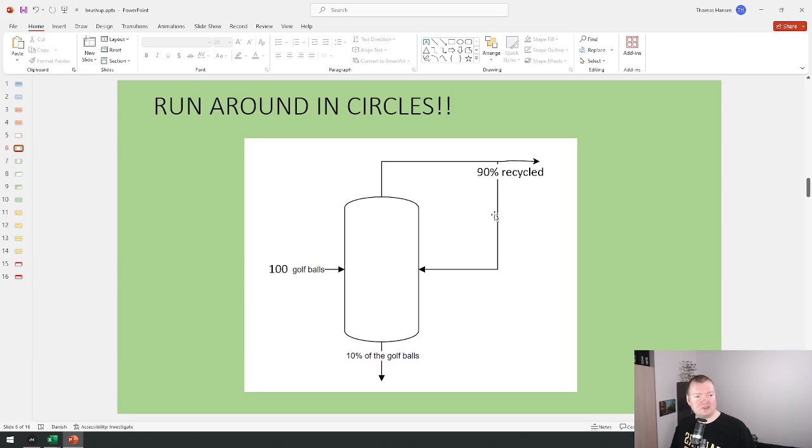So I know that I showed some of my students this lovely example here where we have an extremely simple system with some golf balls entering into a tower. Some of them go out the top, 10% go out the bottom. Then we have a split where we recycle 90% and then it just continues moving on. Now, if we didn't have the recycle, this would be so easy. 100 golf balls enter, 10 of them go out the bottom, 90 go out the top. The system is now in balance.

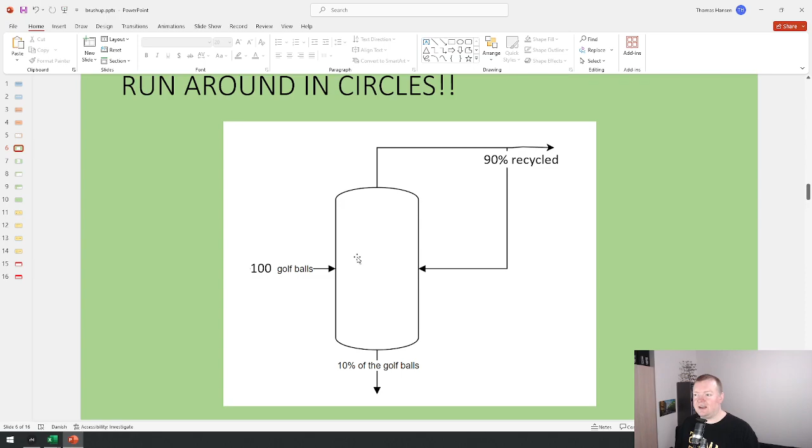The problem is when we start to have this recycle, the 10% is not based off of the feed, it's based off of how much is actually in this tower. And I actually tried to set it up in a lovely document called Thomas Hates Us, because of course I do, that's the way it is. And I have set up a simple mass balance, so I have my system and recycler, and then I have the two extra rules. 90% is recycled and 10% of the total amount in this tower gets thrown out the bottom. And when I solve these equations, I can easily get these results.

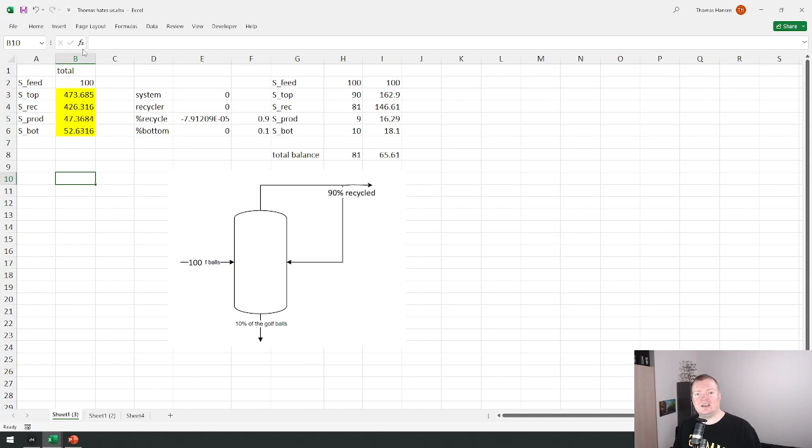And as we can see in my solver settings, I basically set it up like we normally do.

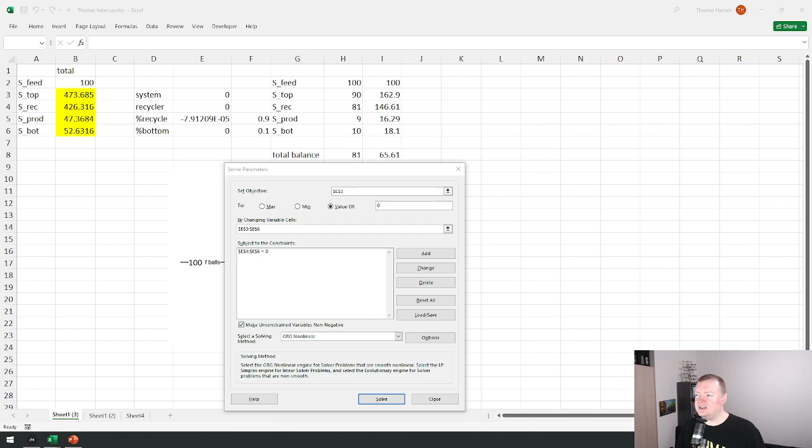Actually, I think I forgot to change. Let's just turn my lovely screen into grandmother mode so it'll be a bit easier to see on stream what's going on. There we go. Nice and massive things. Oh, it looks horrible in real life.

But the thing is, some of you might say, well, can't we just do it by hand? Can't we just take it step by step? And the thing is, technically you can. So for instance, over here, I've started to set it up. So I said the first time I send in 100 golf balls, I have 100 in my feed, 90 goes out the top, 10 goes out the bottom. And then I can easily calculate, well, if 90 goes out the top here, 90% is recycled. So I just take 90% of that. That's what's recycled. And of course, the rest goes to my product.

Now, the next time I send in 100 golf balls, I say, okay, I'm going to add 100 balls in the feed. In my bottom stream, I'm going to take 10% of what's inside of this tower. Now, that would be my new feed of 100 and the recycled stream of 81. So that means I'm now sending 18.1 balls out the bottom of this system. And similarly, I can calculate, well, if I take all of the balls, subtract the ones that went out the bottom, the rest must exit in the top.

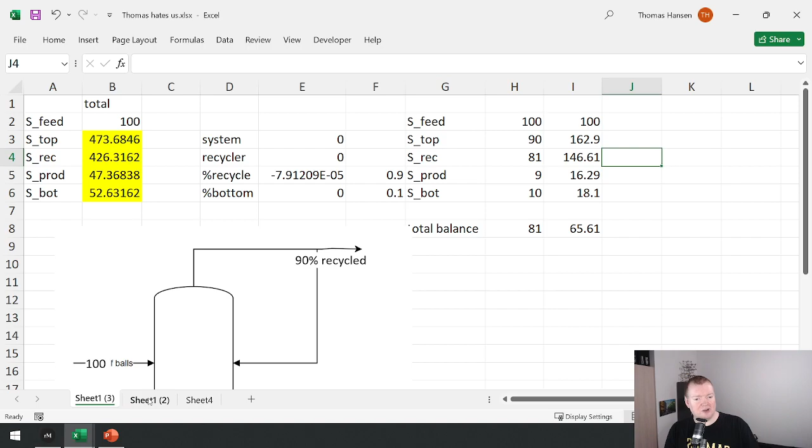Well, I made the slight effort of actually trying to calculate this. So every time we go one step, that's another 100 golf balls we are feeding into our system, and we just keep going until down here I put in my total mass balance. So that's how many balls are in the feed, how many are in the product stream up here, and in the product stream down here. And of course, we know that if a mass balance is matched up, this should give us 0.

You can also see here, this is the number of steps, so the number of times I have to do calculations. And when I was doing it, I figured out I was doing 4 manual calculations each time. So how many times do I have to repeat it? Well, actually we can just look. This is my total mass balance, so we need to be sort of in the area of 10 to the minus 12.

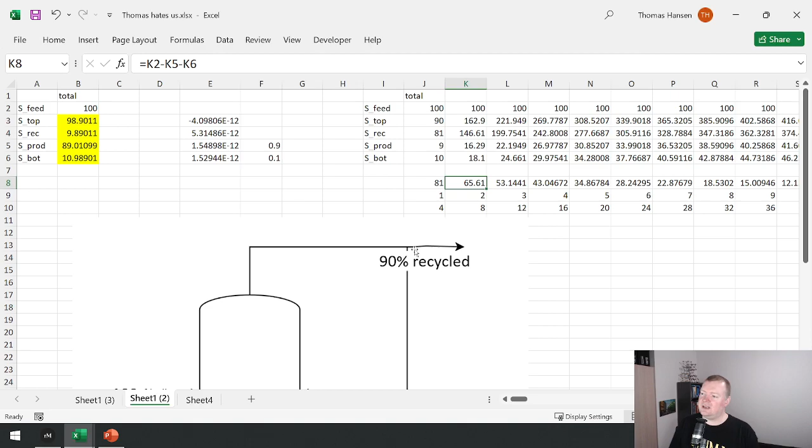So we start here, and then we start going and going and going. 6, 7, 8, 9, 10, 11, something around here. So now we're sort of getting to the same ballpark precision as what I had with the way I solved the mass balance. So yeah, somewhere around 580 or 600 calculations in order to get the same level of precision.

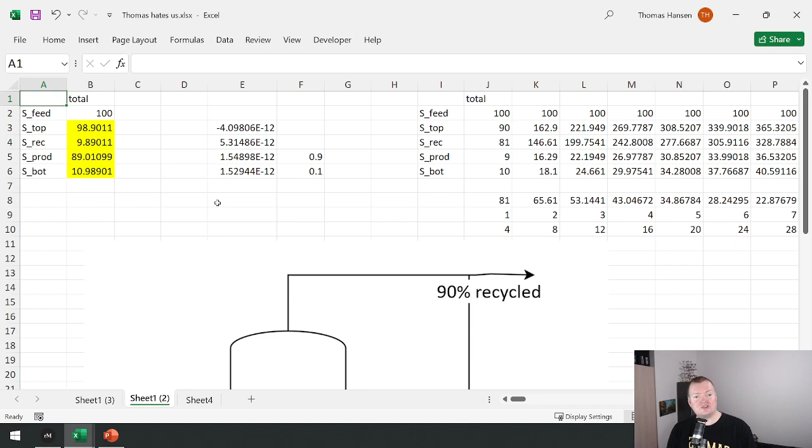Now, we don't want to do 6,000 calculations each time manually. We want to somehow make it automatic. So that's why when we start to get into recycles and bypass streams, it becomes so much more difficult to deal with without using Excel and solving all of the equations simultaneously.

So normally we could say, what is the value of, let's say, the top stream here? Well, that would be this stream plus this stream minus that stream gives me this stream. Unfortunately, this stream will depend on this stream, and then I have this circular loop. So it's also very easy if you try to do it non-systematically in Excel to get circular references where Excel just goes, you can't do that.

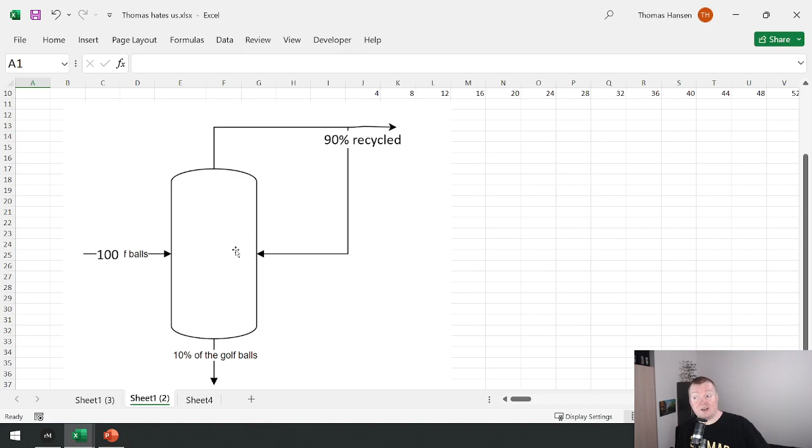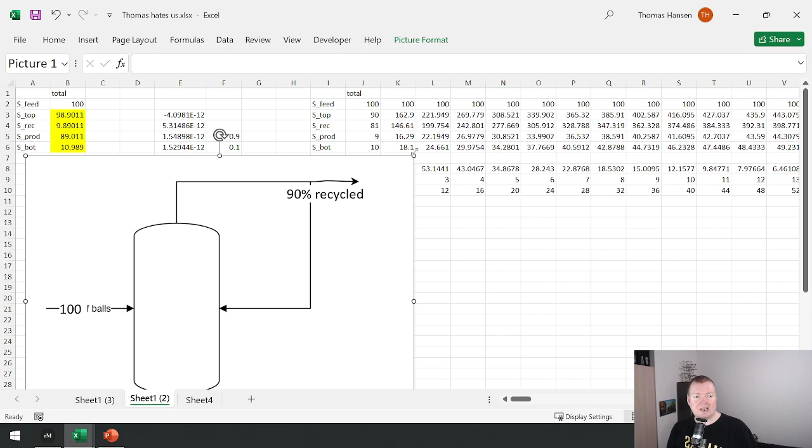You can't say that you want to calculate stream 2 based off the value of stream 4, and you want to calculate stream 4 based off the value of stream 2. That's just not possible. So as an example here, let's just shrink this down a bit so we can see what's happening. So I just have my feed stream, my top stream, recycle stream, my product stream up in the top, and my bottom stream. All of those masses are unknown.

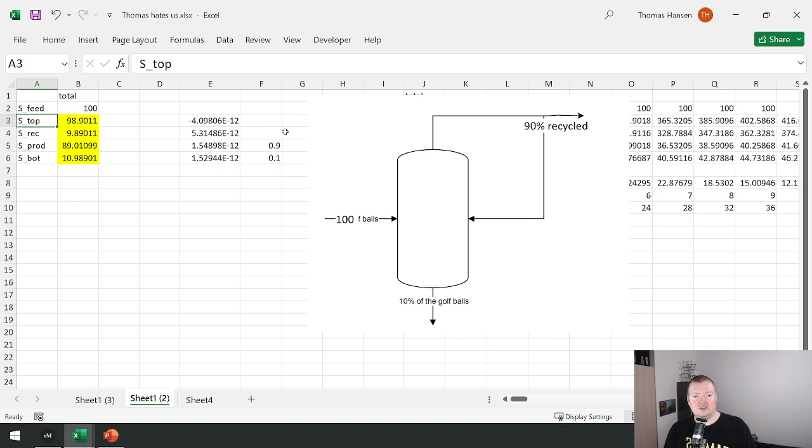And I just start out here. Let me just check, is this my system balance? So this is for my tower, so for this box in the middle, and I say stream 1 and stream recycle go into this, so B2 and B4, minus the two streams exiting, so that would be my top stream and my bottom stream. So this was my tower balance.

The next one here is my recycler balance. And then I have two bonus equations. One is that 90% has to be sent back here. So I just take my top stream, multiply it by 90%, subtract the mass that I find down here. If that holds true, if I'm recycling 90%, that should give me 0.

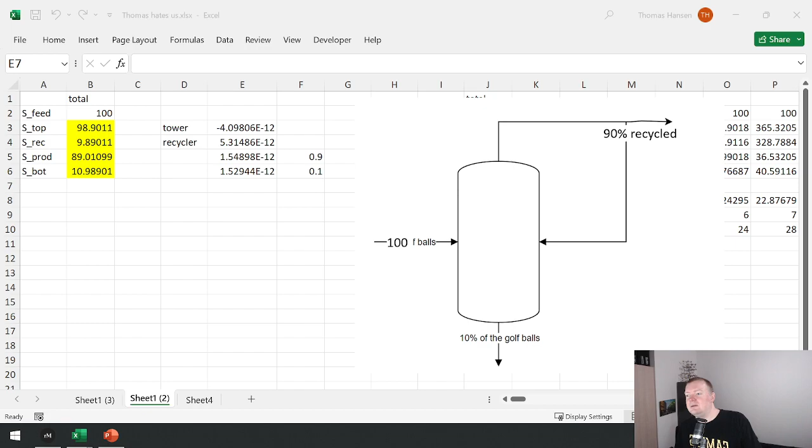And finally, for the 10%, I simply say I have my feed, I have my recycle stream. If I add those two up and subtract the bottom one, then that should end up giving me the desired values. And then I just solve it. So that's how you would set this up. But I just included this to remind you that we don't want to run around in circles. We want Excel to go through all of these iterative calculations for us.

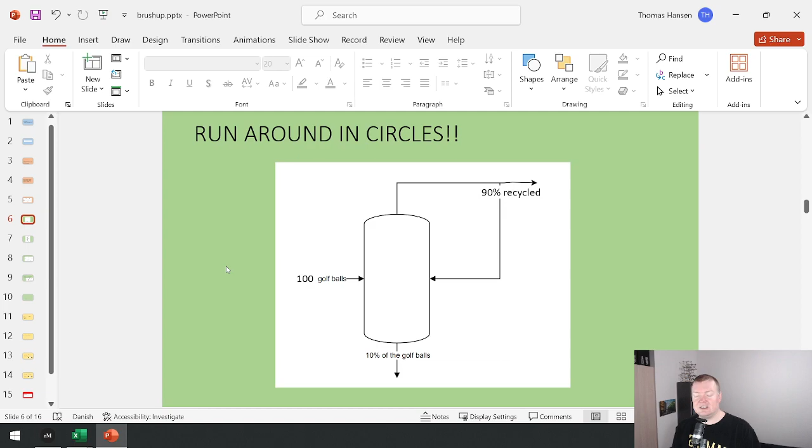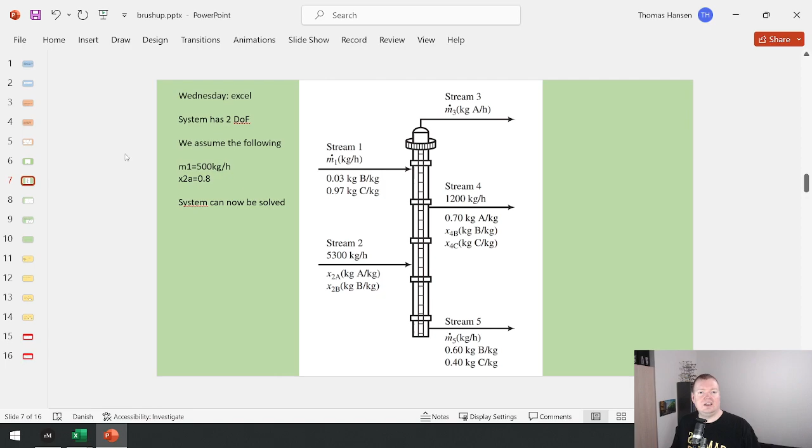And now we can start to look at one of the actual assignments that I suggested for today. So we're going to start with this distillation tower. In this case, we have two streams going into our tower, and 3 streams exiting our tower. You can have this in reality. This is not just made up. Many distillation towers have multiple feeds or multiple product streams.

So for instance in petrochemical production, if we want to make diesel and gasoline, we can take some mixture of crude oils and distill it into different fractions. So that would be the different types of fuel we get. So not an uncommon thing to see.

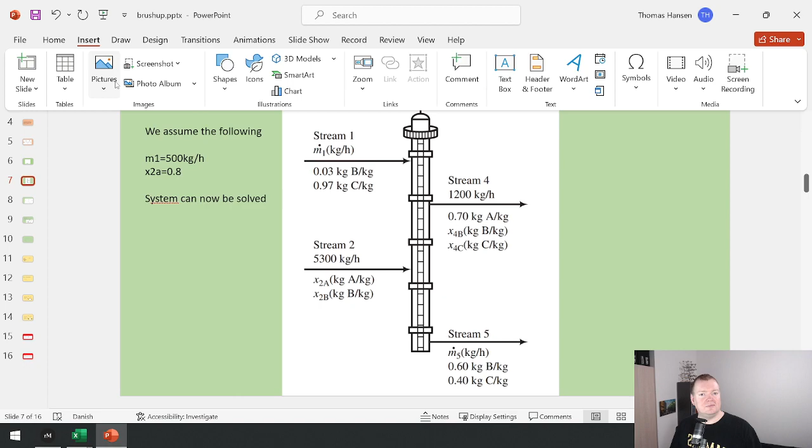In this case, we have 3 components, A, B, and C, and we have various information. In some of the streams we know the masses, in some we know something about compositions, and so on. Now, if you do a degree of freedom analysis of this one, we will actually end up with a problem. Let's see, can we draw something?

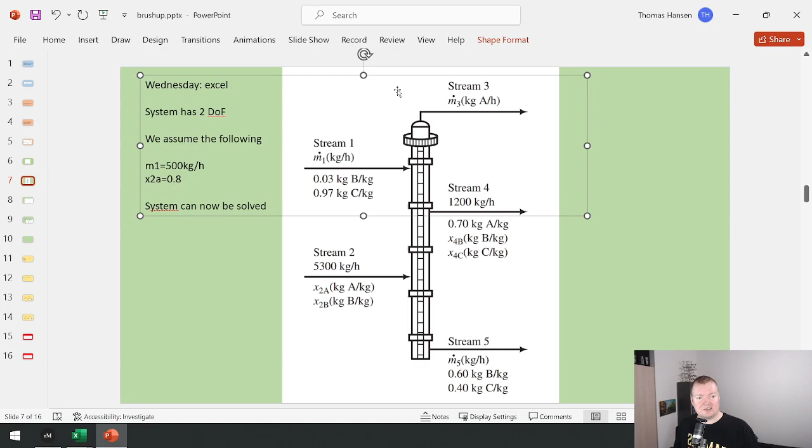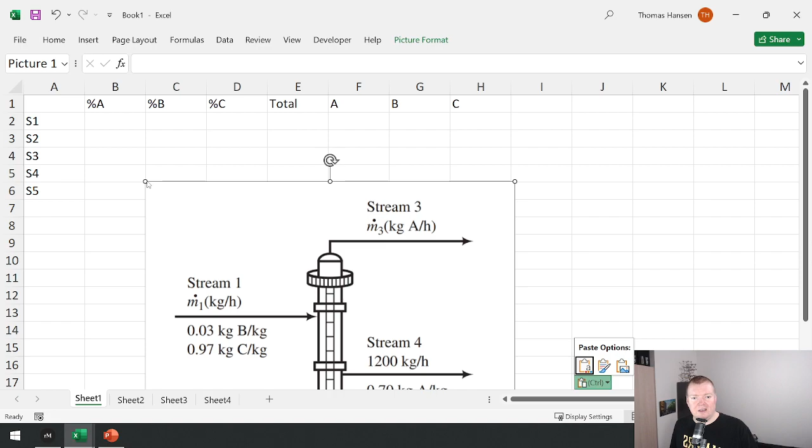But let's take this lovely thing and chuck it into Excel. I think I set up a lovely little example for it. Yeah. So I already put up the different streams that I have, and we just have to fill in the different values. So for instance, in our top stream, stream 1 here, there's no A, 3% of B, 97% of C. For stream 2, I know that there's no C, and I'm gonna say B is just 1 minus whatever A ends up being. That's gonna be an unknown.

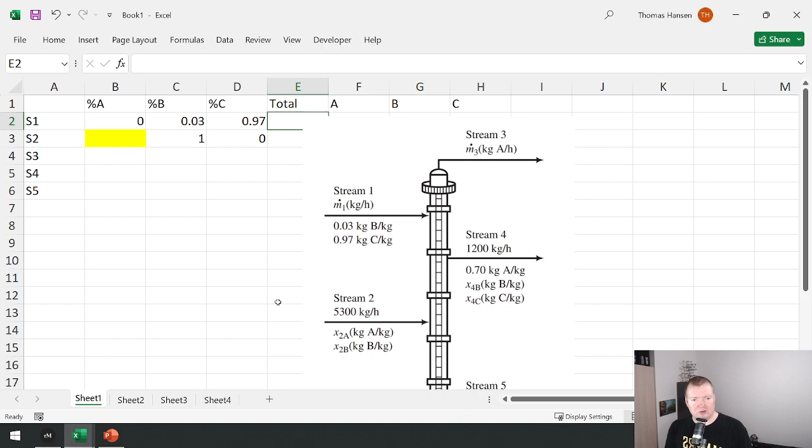Total masses, can I just move that a bit? Total mass of stream 1, no idea what it is. Mass of stream 2, 5,300. If I look at stream 3, I don't know the mass that I'll have up there, but I do know that it's gonna be only A. In stream 4, I know my mass. I know I have 70% of A. That means I have no idea what B might be, but the percentage of C is 1 minus the sum of the two others.

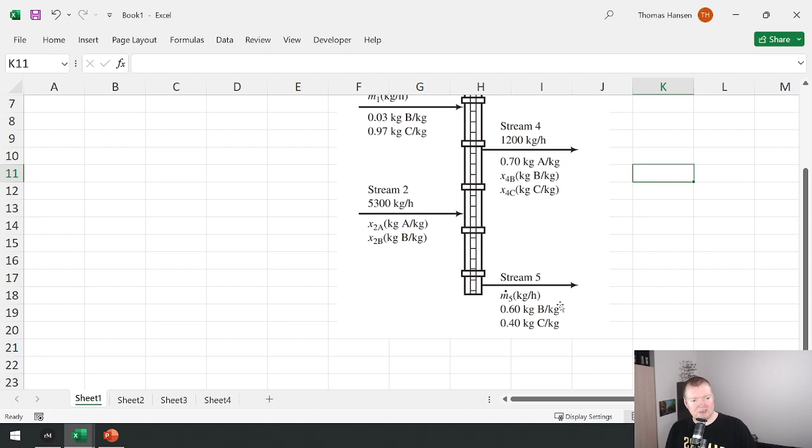There we go. And for stream 5, scroll down a bit. I don't know what the mass is, but I know the compositions. So unknown mass, 60% of B, 40% of C, no A, check. So that's basically the information that I have. 5 unknowns, and over here I can calculate just like I normally do. That one times the percentage.

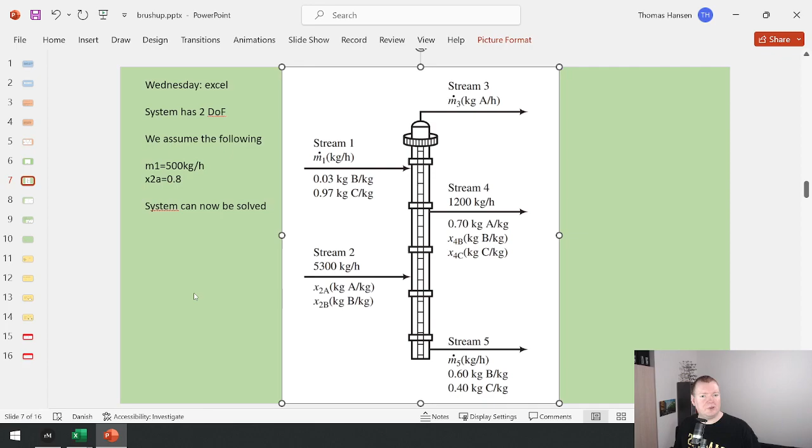Fill right and down, and I then had some values I wanted to put in because I said I have too little information. I just need to check. M1 is 500 kilograms and that one is 0.8. So 0.8, 500 kilograms. Was it M1? Yeah. So that means this one is no longer an unknown. I've decided what I want it to be. And here I've decided what I want it to be. 3 unknowns, and I said I could set up 3 equations.

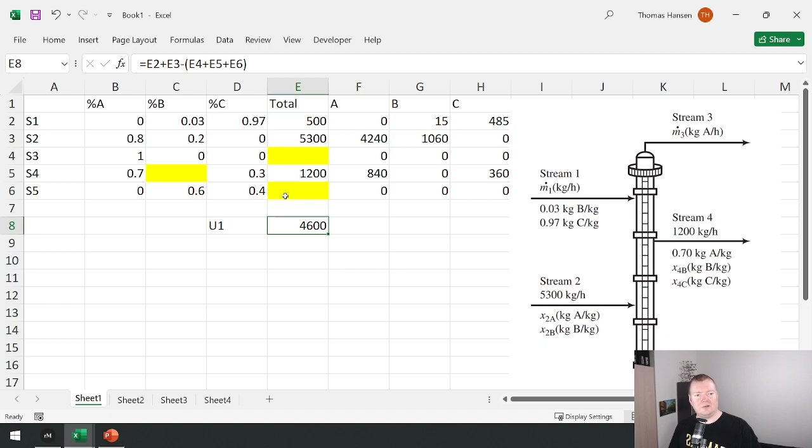So let's try. So I'm gonna look at my unit, and actually let's just move that over here. And I'm just gonna say for my total mass, what goes into my system, that's stream 1 plus stream 2. What goes out? All of the others. 3 plus 4 plus 5. There we go. And I can fill that to the right. That gives me 4 equations. I'm only allowed to use 3 of them. The last one will not be independent of the others.

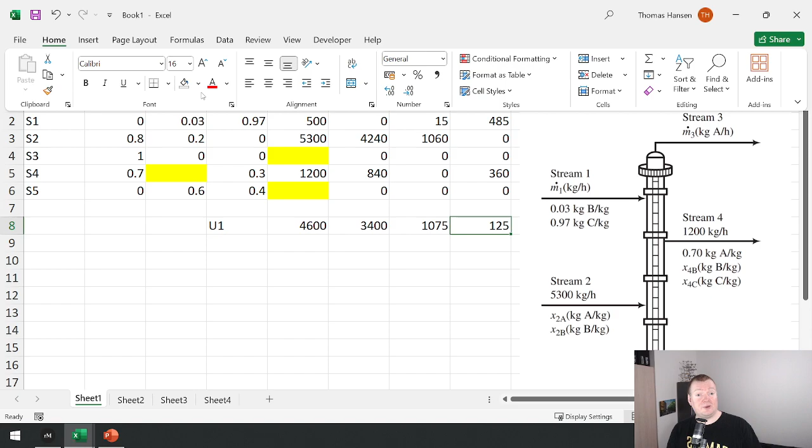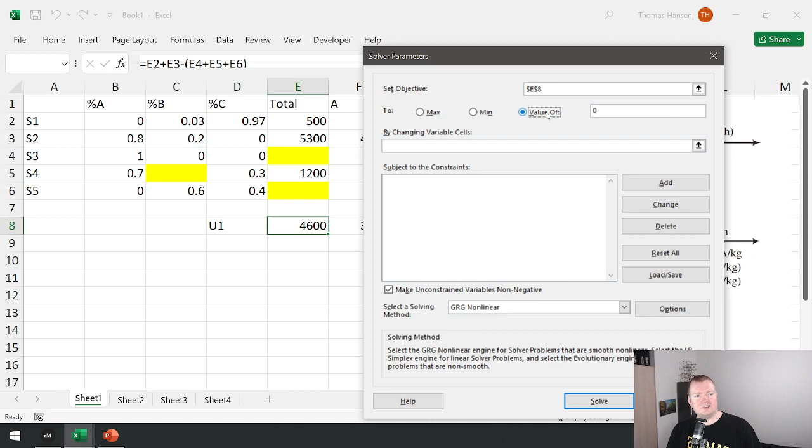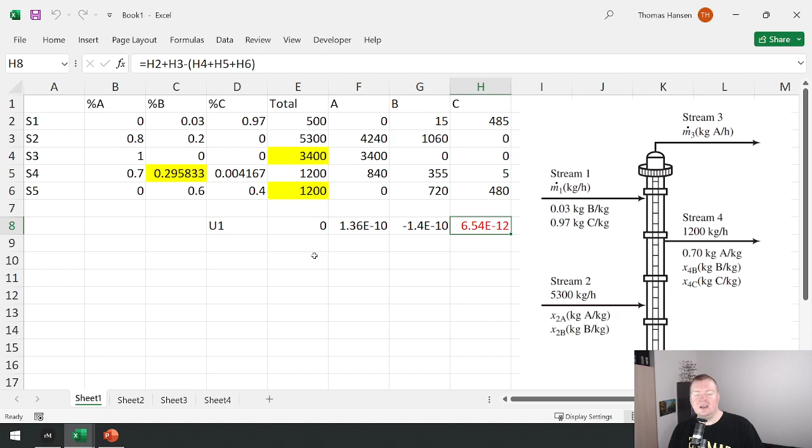So 3 equations. Let's see if we can set that up in Solver. And I basically say the first equation, value of 0. The 2 other equations, value of 0. And I'm allowed to change all those 3. And I can't remember if it messes up. No, it looks fine. Solver found a solution. And does it look reasonable? Positive masses, percentages look fine. Everything is close to 0. Yep, I have now solved this system.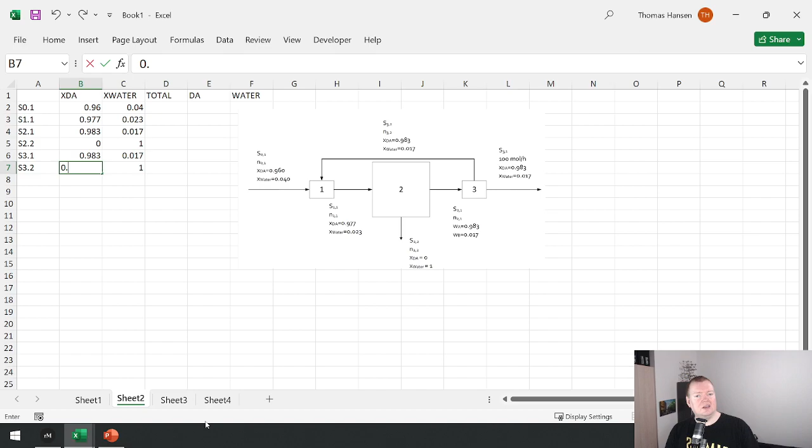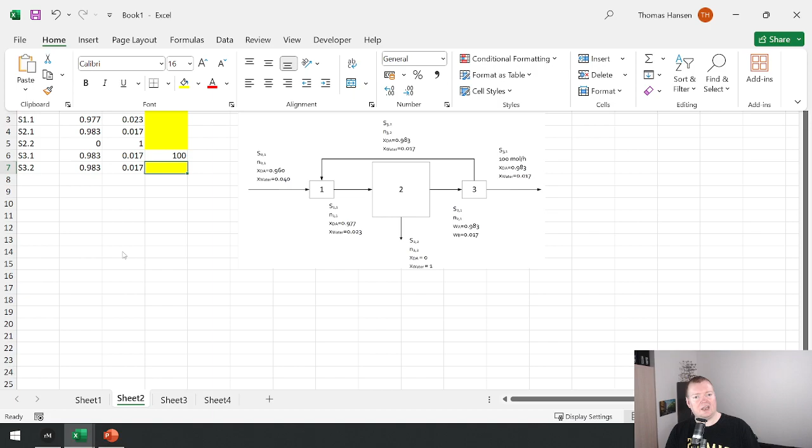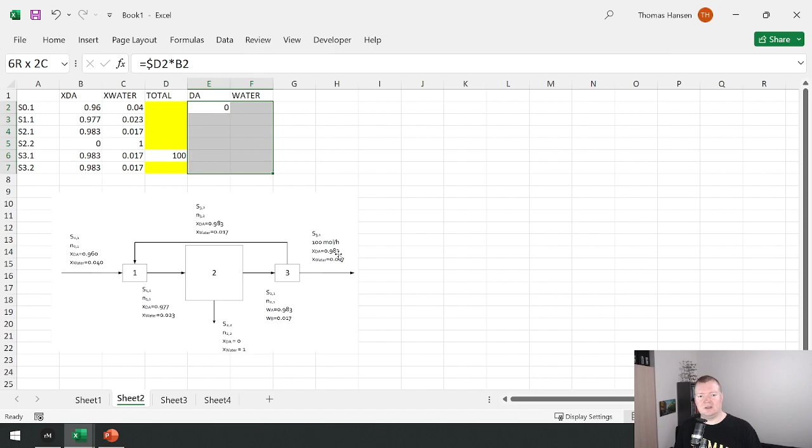3.1 is 0.983, 0.983. That should check out. Total number of moles for all of these, no idea. I know I have 100 there, and I know I don't know what will be there. And finally, calculating the different component amounts. Fill right and down. There we go. And now I want to start to set up the different equations that are possible for this system. So I'm going to do it systematically and say I have for my total system unit 1, unit 2, unit 3. And for all of those, I could set up a total, a dry air, and a water balance.

So let's look at our total system. So we're going to put in our magical square, if I can remember where it is. There we go. So we're going to put in our magical square and say if I'm only looking at the entire system, all I know is that stream 01 comes in, and stream 22 and stream 31 exit. Okay, that would be my total balance.

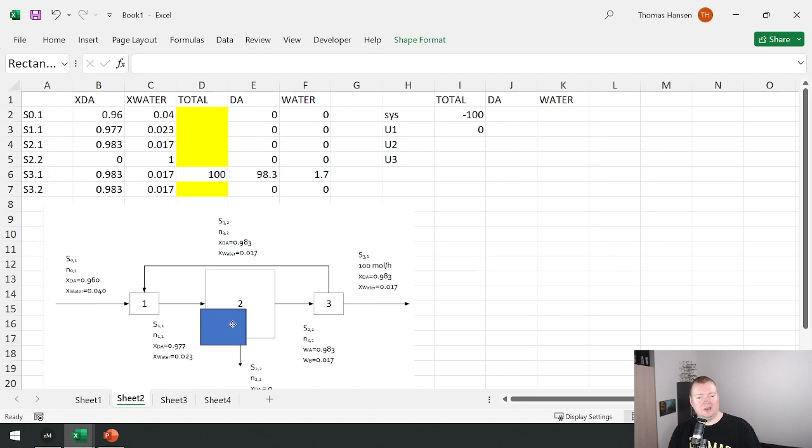Then we look at our first unit operation. What do we know about this one? Well, I know that stream 01 goes into it. I also know that 32 goes back into it. And I know that stream 11 exits it. So stream 01 plus 32 minus 11. That's my balance for that one. We move to unit 2. What do we know about that?

Well, in my unit 2, I know that stream 11 goes in. I know that stream 22 and 21 exit, and that's all I know about that. And for my final here, well, stream 21 goes into the system there, and stream 31 and 32 exit.

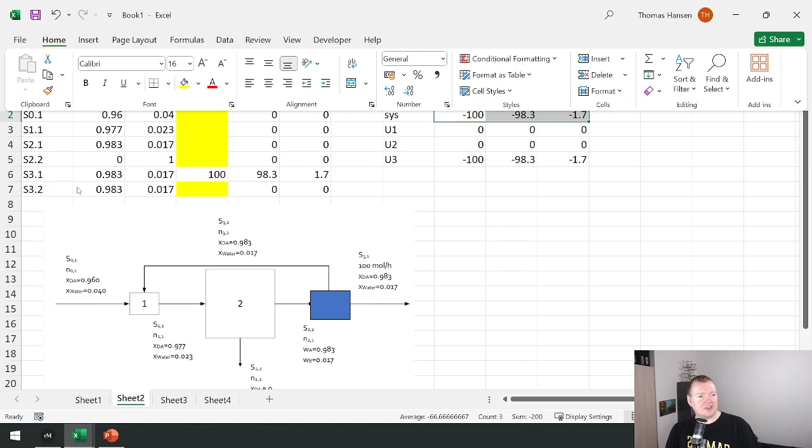But I've now written all of the lovely mass balance equations that I can. Gonna fill them to the right. And now we start to get into where we have to decide what equations do we want to remove. This time, because I've looked ahead a bit, I'm gonna remove my system balance. We're gonna remove our water balance here and say these are not independent of all of the others. That would normally be sufficient.

However, for our unit operation 3, the concentration that goes in and the two that come out, the compositions are the same for all of them. So that means only one of these 3 equations is independent of all of the others. And you might say, hey, hang on, why is that? Why is it that suddenly we have to do it like that? So, come on.

Where did my reMarkable go? There it is. Oh no! I lost synchronization. What a horrible thing to happen. Let's do my quick sheets. And I want to share. There we go. Perfect. I will try to remember not to close it down again.

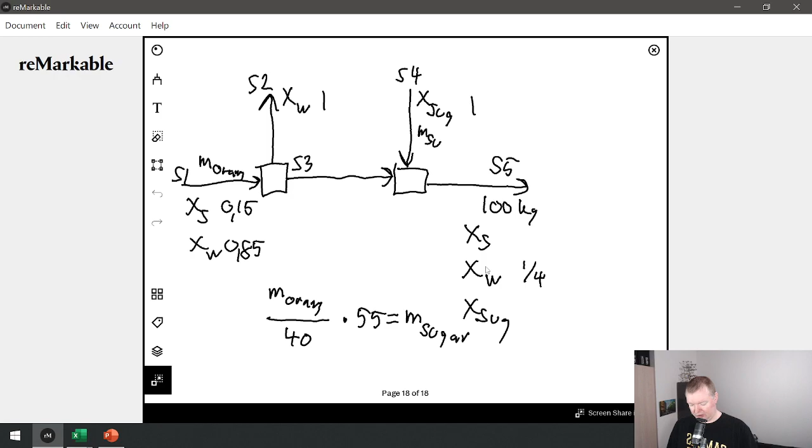So, why is it that when I have a system where I, for instance, just have this one, I have one stream coming in, and then 2 streams going out, and I have the same concentrations everywhere. So let's say we have XA, XB, and just to make it easy, let's say it's 60% and 40%, then A and B in the 2 others is also 60%, 40%, 60%, 40%. Stream 1, 2, 3. So why is it that suddenly I only have one independent equation?

Well, what I can do is I can write up the total mass balance for this system. So the total mass balance for this system would just be stream 1 is equal to stream 2 plus stream 3. Okay? Now, if I then want to do my component A balance, well, all I have to do is take all of these and multiply them with the concentration of A, which in this case means I multiply everything by 0.6. So that means I'm taking one equation and just scaling it to a different size. That means it's not independent.

It's like in class I often say, well, if I have x plus y is equal to 10, and I ask you to solve it, many of you will say, well, we can't. We have two unknowns and only one equation. We need another equation. And I go, yeah, sure, I'll give you another equation. 2x plus 2y is equal to 20. And you go, no, that's not the type of equation we need, because this is just the first equation, everything multiplied by 2. So when the compositions in all of the streams are identical, then we have this issue that all of our mass balances are dependent on each other. We can only use one of them.

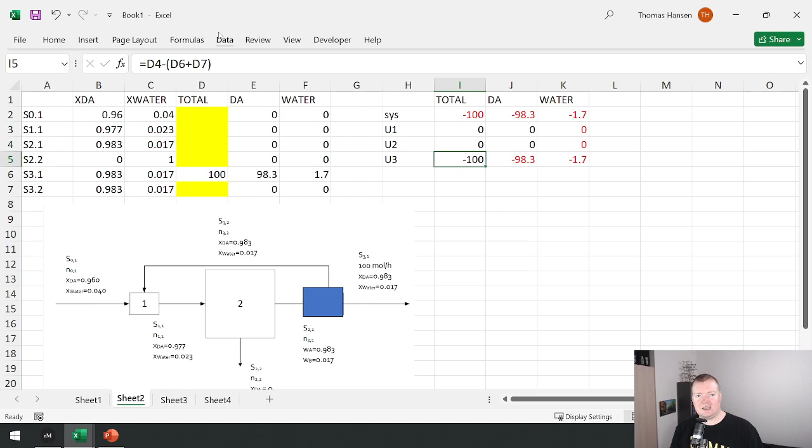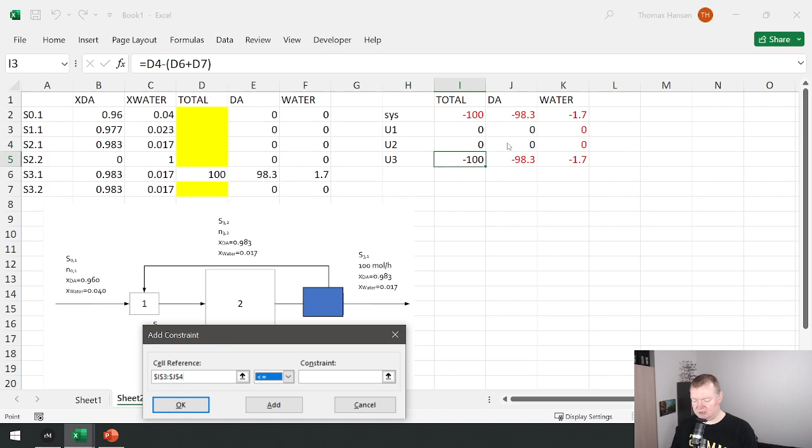So that's what we'll do in this case. We jump back to the Excel and we say, okay, I'm only using one of those. I can use those 4. So I have 5 equations. Let's hope 1, 2, 3, 4, 5 unknowns, exactly what I want. So again, data and solver, and just like we did before, I want this one to be 0. I want my other 4 equations here to have a value of 0, and I want Excel to change the values in all of the lovely yellow cells.

Solve it. Excel found a solution. Everyone's happy. We just check. All of my equations trend toward 0. All of my masses are positive. Looks reasonable. Yep, I have now solved another one where I have this recycle stream. Where's my recycle stream? So one thing you should also notice is if you look at our recycle stream, I'm recycling 290 moles. So in this pipe, I have 290 moles flowing every hour. But in my feed stream over here, in stream 01, I'm only putting in 102 moles.

So that is how we have this buildup of material over time, that when I turn this air conditioning unit on, I won't reach this lovely balance to start with. I have to nurse it into this steady state. But once I reach a point where I have 290 moles flowing here, then I can have a steady state where I send in 102 moles here, take out approximately 2 moles here, and deliver 100 moles to the room. So even though I'm only sending in 102 moles, I can have pipes in my system that at steady state will move around way more material.

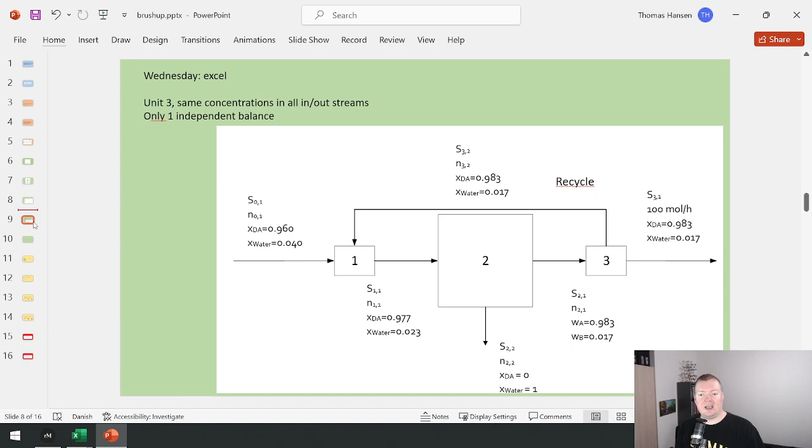Which one did I have envisioned next? Let's see. Oh dear. So this is time for me to sit down. Oh, that might be noisy. Actually, let's just take a short break. I'm gonna sit down and then we'll continue. Hopefully you're joining me there. Yeah, comfortable enough. There we go.

Okay, so this one we have not done in class, so let's have a look at what the text says. So this is a simple extraction where I want to send in some beans, where I want to extract some oil from them, and I want to use, I think it's hexane. Yes, I want to use hexane in order to extract the oils from those beans.

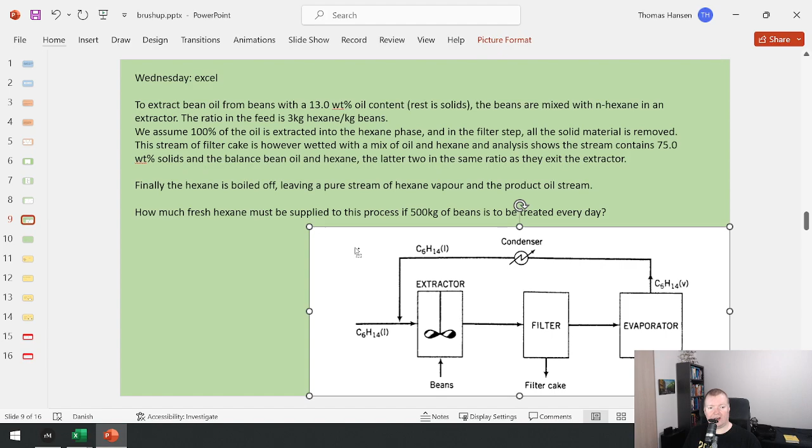I lead that mixture onto my filter, and in that filter I'm gonna remove some filter cakes or some solid materials, and finally, I want to take all of my hexane that I've paid a lot of money for. I want to evaporate it, reuse it, and have this cycle going, and hopefully have completely pure oil exiting. Now we're getting a lot of bonus information in this one, but we're gonna try and set it up. So we'll start just with the drawing and the information we have from the drawing.

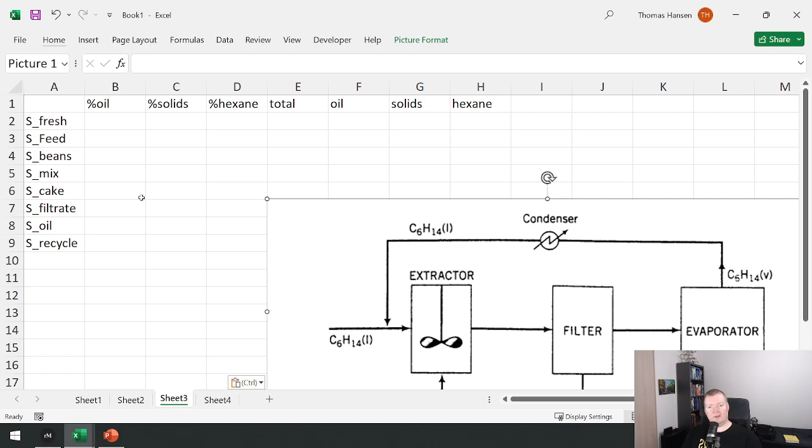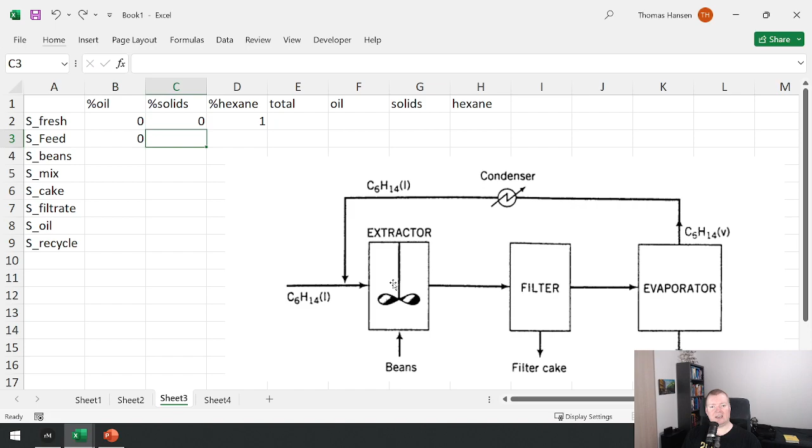And as you can see here, I have decided to name the different streams, not stream 1, 2, 3, 4, but basically what they are. So for instance, I have my stream of fresh hexane. So hopefully, since I'm paying for it, that's gonna be pure hexane. In the feed into my extractor, again, I would hope that that's just pure hexane. Let's just crop that a bit. There we go.

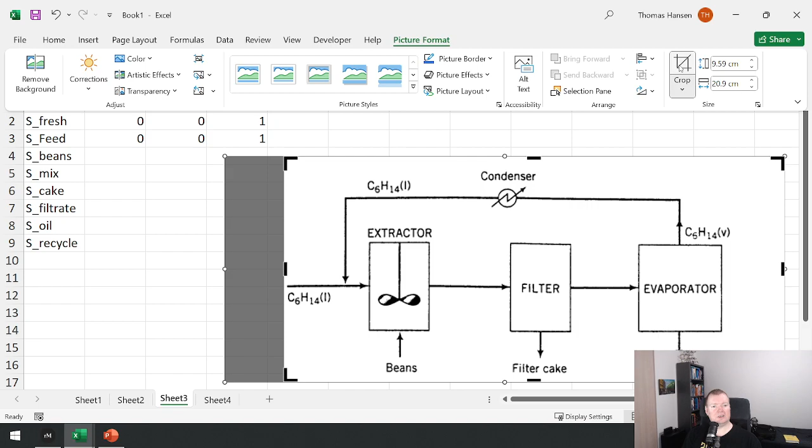Then I have my beans, and then I need the information about my beans. So let's go back to the assignment, read what it says about the beans. Actually, I'm just gonna do like this, so now I can see it and you can't, haha. So my beans would contain 13% oil, and the rest would be solids. So 1 minus the 13%, there's no hexane in my beans.

Then I mix it all together. At that point, I don't know what the compositions are. So I'm gonna say no idea for those two. The final one, 1 minus the sum of the others, like we normally do. In my filter cake, do I know anything about that? Let's have a look. I know that my filter cake contains 75% solids. So that means this must be equal to 1 minus the sum of the two others. But that also means that this one, I don't know right now. No idea what it is.

After my filter, hopefully I've been able to remove all of the solids. So that means I only have one unknown, and I'm just gonna pick the oil as being my unknown here. And finally, over here, I want pure oil exiting that stream, and I want pure hexane in my recycle stream. So that's what I'm being told in terms of compositions.

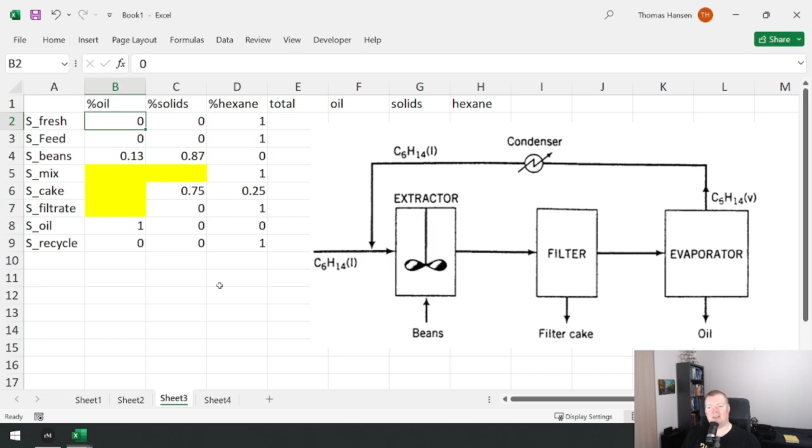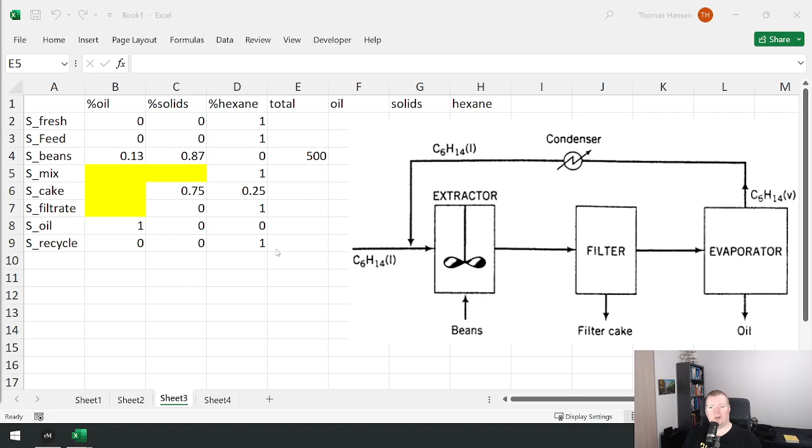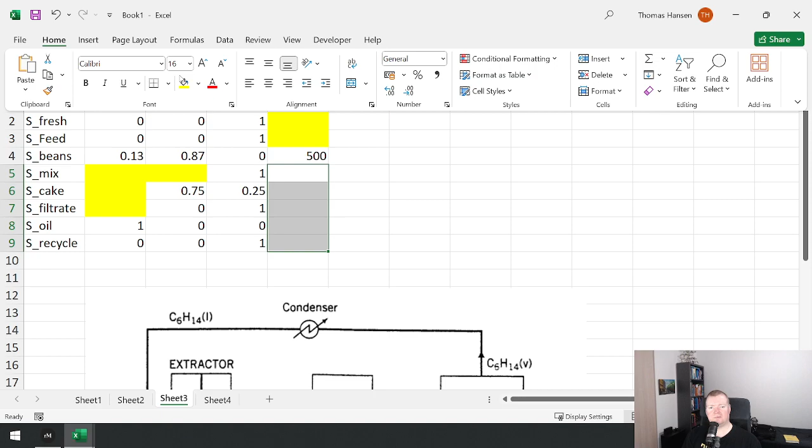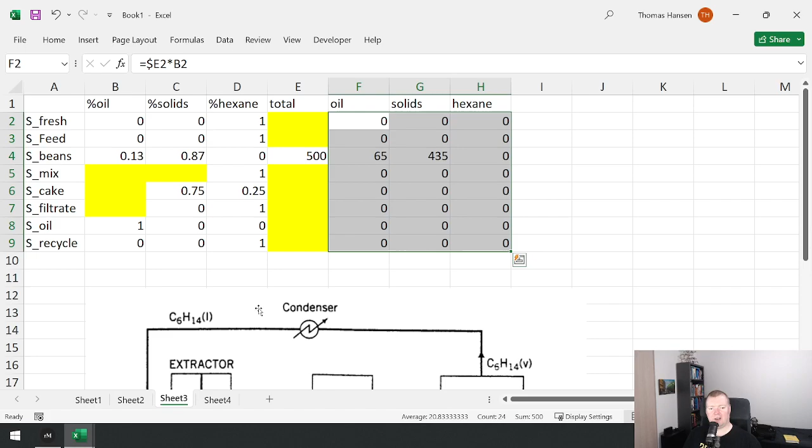Then I start to look at what do I know in terms of the masses that I might want to send into this. And I need to figure out how much hexane I need if I want to process 500 kilograms of beans. So we jump over here, find our bean stream, and we say that needs to contain 500 kilograms. Do we know anything else? We don't know anything else about masses, so for now we're just gonna say these are unknowns, and all of these I want to calculate by multiplying percentage with total mass, fill right and down, and then we have to start setting up our mass balances.

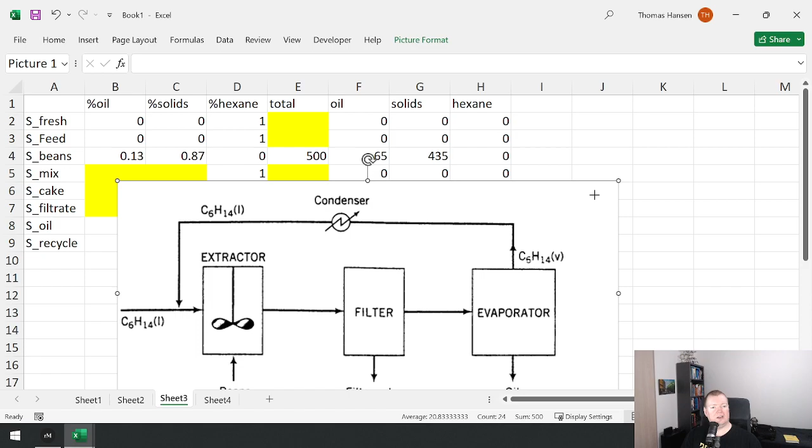Oh, this is gonna be tricky. Let's see if I can make this a bit smaller. Hopefully you can still see what's going on. But in this case, I would be able to set up a balance for my mix point here, for my extractor, for my filter and my evaporator, and for my entire system. So let us do that. We have our system, we have our mix, our extractor, our filter, and our evaporator. And for all of those, I could set up balances for the total mass, for the oil, solids, or hexane. We're just gonna focus on the total for now.

Anything in chat? Nope, everything's fine.

Total. Let's look here. I have one stream entering, that's my fresh hexane. I have beans entering, so where's my bean stream? That's there. And what streams do I have that are exiting? I have two streams. I have my filter cake, that's the cake stream, and I have my oil stream. Those two should exit my system. That's the balance for the entire system.

For my mix point here, I have my fresh feed entering. I have my recycle stream, so the one that goes here has to go in there as well. And finally, I want to subtract what I call my feed. So that's my feed to my extractor. There we go. Balance for the extractor. Well, my feed stream enters, my bean stream enters, and my, hang on, why did I call that mix?

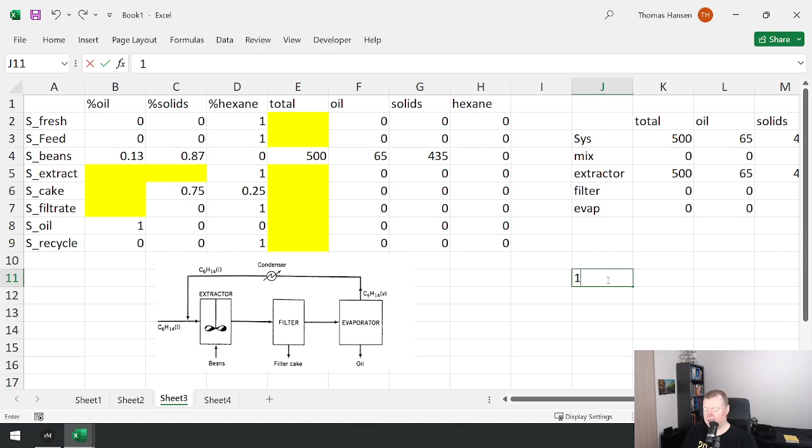For my evaporator, I have my filtrate entering, and I have my oil and my recycle stream exiting. And these I can fill to the right. So before we go over there, how many unknowns do we have? 1, 2, 3, 4, 5, 6, 7, 8, 9, 10, 11. So I count 11 unknowns.

And then we need to look at how many different equations we can use. So like normally, we're gonna remove one row. We're gonna remove one column. And then we start to look at what is possible. For my mix point here, it's pure hexane in all of the streams. So we have the exact same problem as in the last assignment, same concentration, pure hexane. So I can only use one of my equations.

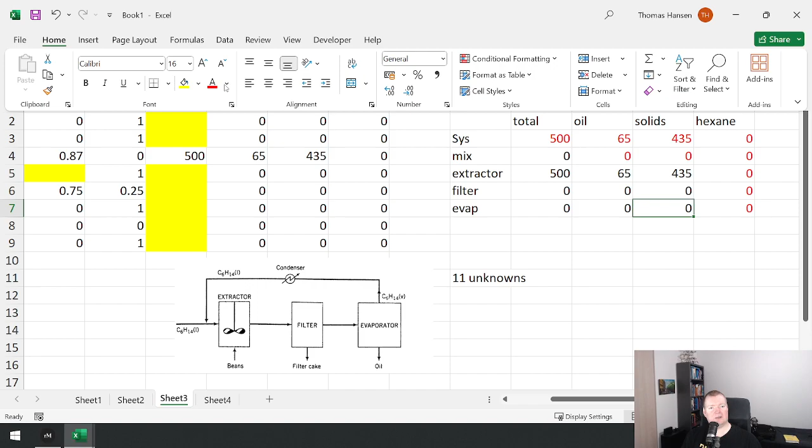Oh, no. So there, in my extractor, I can use all of them. In my filter, I can use all of them. In my evaporator, I have another problem, and that is that I don't have any solids present, right? So I can't use this one either. I'm just going to remove that. It's going to be 0 no matter what I do, but just to do it correctly, I'm going to remove that as well. No solids in this part of the system. Making a solids balance doesn't make sense.

1, 2, 3, 4, 5, 6, 7, 8, 9. So right now I have 9 equations, leaving me with 2 degrees of freedom. I need to find some extra information. So I go back to the description and I say, okay, what information have I not used? Well, for instance, I know that the ratio in the feed to the extractor here is 3 kilograms of hexane for every kilogram of beans. So let's try and put that. Actually, can we copy that? Let's try.

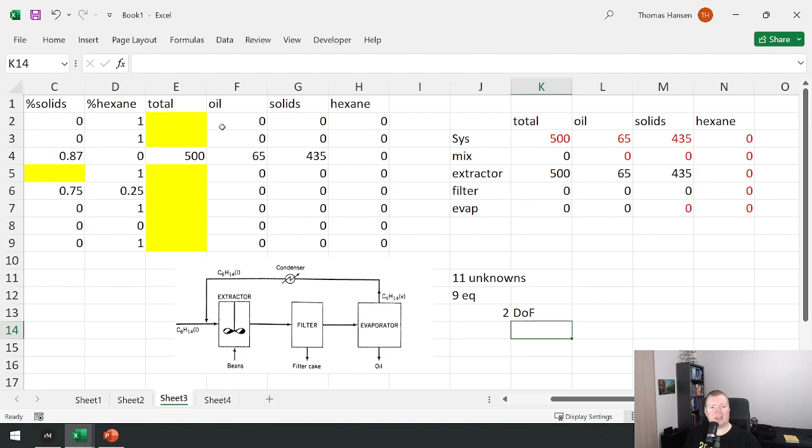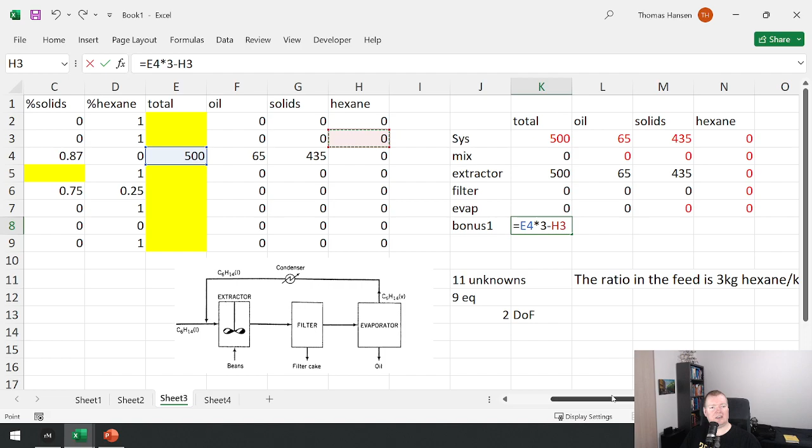Let's try and see if we can put this into an equation. So that's gonna be my bonus 1. So how do we do this? Well, basically it means that if I take my mass of beans and multiply it by 3, I need 3 times as much hexane. So if I take the mass of my beans and multiply it by 3, and I subtract the amount of hexane that is fed into my extractor, if that gives me 0, then I am happy.

We can just test it here. So I know I have 500 kilograms, so I know that if I have 1,500 kilograms of hexane, that equation should give me 0. It does. Perfect. I wrote it correctly. Yay! I'm now down to 1 degree of freedom. Let's move that down here. We use this to get here. And then we need another information. What other information do we have?

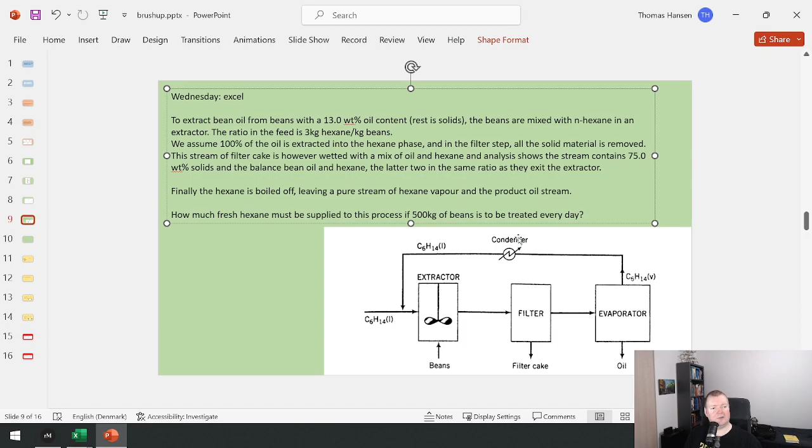Here. The stream of filter cake is wetted with a mix of oil and hexane, and analysis shows it contains 75 weight % solids, balance bean oil and hexane, and those two have to be in the same ratio as the stream exiting over here. Okay, how do we set that up? Well, we can look, where is it? Bonus 2. So, what is the ratio of oil to hexane in this outcoming stream?

Well, that would be the mass of oil in my filtrate in relation to the amount of hexane, and I want to compare it to the ratio in my filter cake. So I just want to subtract, and we go to my cake and say I want the oil over hexane in that one. And Excel gets very unhappy and says you're not allowed to divide by 0. Luckily we can solve that.

We put in some dummy values, so these are incorrect values. I'm putting in values that are in the area of what could make sense. So it would be somewhere between 0 and 1 for the percentages. I have 500 kilograms, so I'm just guessing ballpark it's gonna be that sort of area. Okay, that's just to avoid having the error that it divided by 0.

So now I have 2 bonus equations that hopefully gives me 1, 2, 3, 4, 5, 6, 7, 8, 9, 10, 11. 1, 2, 3, 4, 5, 6, 7, 8, 9, 10, 11. 11 unknowns, 11 equations, 0 degrees of freedom. I should be able to solve it using Solver. And how am I gonna do this easily?

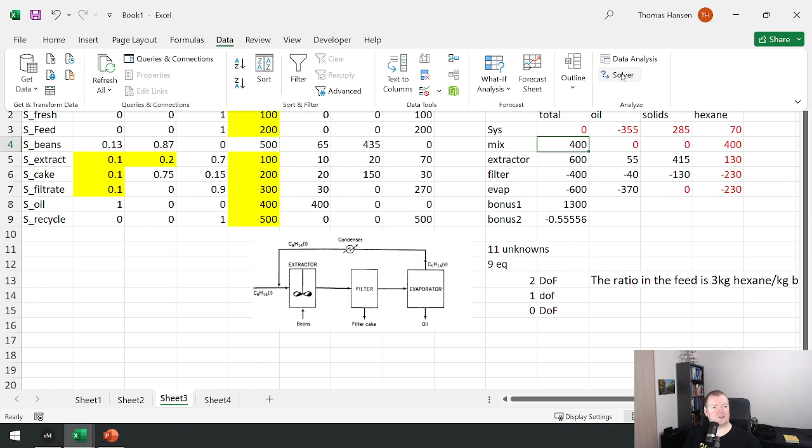I am gonna ask Solver to set that equation to a value of 0, set all of those equations to a value of 0, and set that one to a value of 0. So all of the equations that are not colored red have to give me 0, and Excel can change all of the lovely cells over here, and fingers crossed, might not work. I know this one can be a bit tricky for Excel to get right.

Oh dear, it's taking a long time. Solver found a solution. Are we happy with the solution? Let's see. All of my equations give me close to 0. The masses, they are all positive. The percentages all look fine. So at this point I can say I've now solved the system of equations.

What was the question? How much fresh hexane must be supplied? And we just go to our fresh and say, well, I need to supply 138.9, so 139 kilograms of hexane for every, I think was it on an hour basis or day basis? Day basis. So every day I need to buy 139 kilograms of fresh hexane, and it will leave me with 59 kilograms of oil. So that's how you would approach this.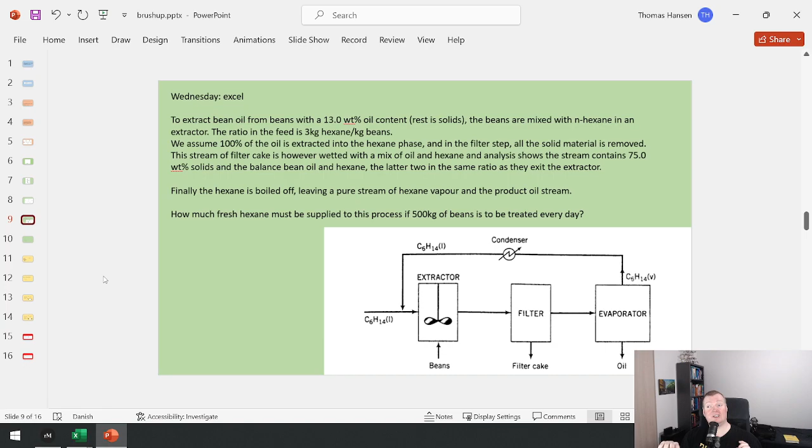Again, it's the exact same thing I'm doing over and over. I'm using the same principles, setting up the equations, setting up Solver the same way every time. And all the way through, I'm making degree of freedom analysis, saying, do I have enough equations? Do I need to look for more equations?

Finally, we have one of the homework assignments. So assignment C, the orange concentrate where we had a bypass. So we take some of our juice and we send it past one of our unit operations. Let's just draw a little sketch, and I need to be able to read the assignment while we do. In this case, we basically have some fresh orange juice and we want to create a concentrate. We want to remove some water.

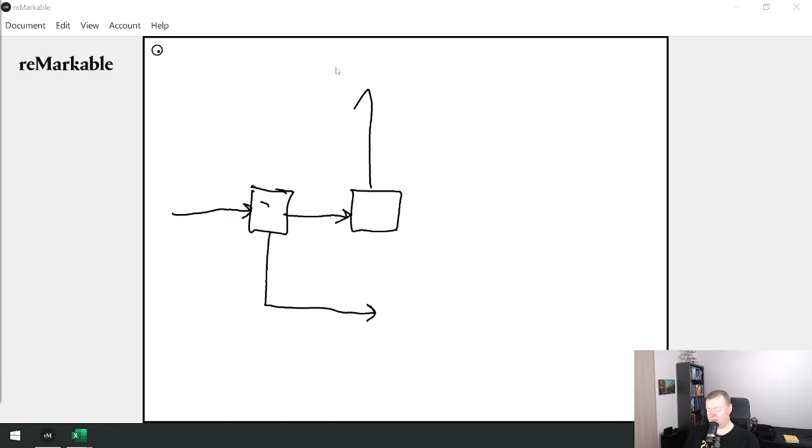The way we're going to do that is we're going to send in our fresh orange juice. I would actually prefer to send that the other way. We're going to bypass some of the juice. The other juice we're going to send to an evaporator where we're going to remove some water. And finally, we're going to mix it back together. And then we have whatever comes out here.

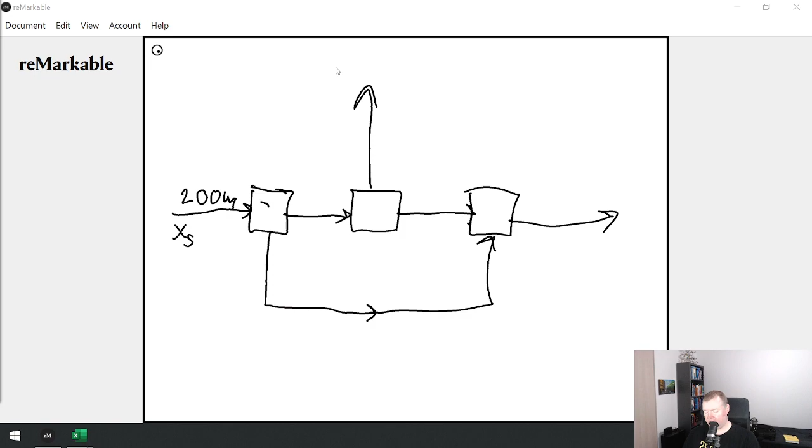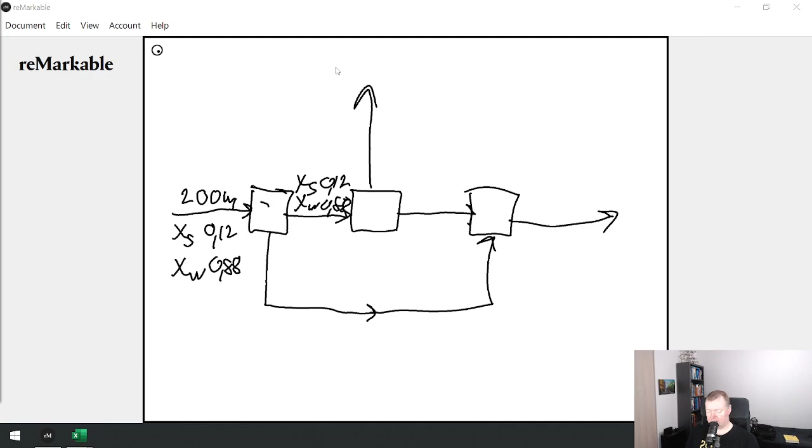Now, the information we are being given: we would like to use 200 kilograms of fresh juice. And we also know that the solids over here will be 12%. The percentage of water is going to be the balance, 88%. And because we are just bypassing, it's just a simple splitter of the stream. So the concentrations over here for solids and water are going to be 12 and 88%. The same for the bottom one, 12%, 88%. For the water stream where I want to remove my water, that's going to be pure water.

For my extract over here, I'm being told in the assignment that the percentage of solids in this stream is 58%. That leaves me with composition of water of 42%. And finally, my product that I want to sell to my customer has to have a solids percentage of 42%, and the amount of water would be 58%. So that's the system I want to try and set up in Excel. I am not being given any other information than that. So let's just grab that artwork and see if this actually ends up working.

Where was my Excel? And again, I've cheated and set up part of the Excel sheet ahead of time. So we're going to start to fill out the information. I know that I have 12% solids. And for the water, I'm just going to take 1 minus the other percentages. In my bypass, 12%, my feed, 12%, the water is no solids, the concentrate is 58% solids, my product is 42% solids. The totals, the only thing I know is I want to send in 200 kilograms. The rest of them, no idea. To calculate the amounts, take the total mass, multiply by the percentage, fill right and down, and then I can count 1, 2, 3, 4, 5 unknowns.

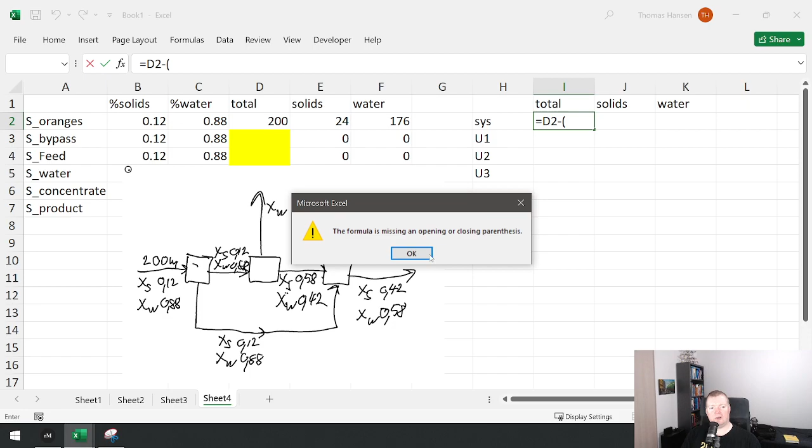How many equations can I set up? Well, I have 2 components and I have 1, 2, 3 unit operations. So I would normally expect 2 times 3 independent equations. Let's see how that turns out. So again, system, unit 1, unit 2, unit 3, and I want my totals, solids and water. I'm going to look at my system. What comes in is the fresh oranges. What goes out? Well, oh no, I have to remove the picture a bit. There we go.

Sorry about that. That stream enters my system. What exits? Well, that's my water stream, and it's my product stream. There we go. My unit 1, what comes in is the total of oranges. What goes out would be my bypass and my feed.

For my unit 2, what comes in would be my feed. What goes out would be my water and concentrate streams. And for my unit 3, what comes in would be my bypass stream plus my concentrate stream, and it's only my product stream exiting. And again, I can just fill it to the right, and then we have to figure out how many of them are independent.

I'm gonna remove my system. I'm gonna remove that one. And for unit 1, same concentrations in all of the streams. I'm only allowed to use one of those 3 equations that I have written for unit 1. So that leaves me with 1, 2, 3, 4, 5 equations, 5 unknowns, 0 degrees of freedom. I can just fire up Solver.

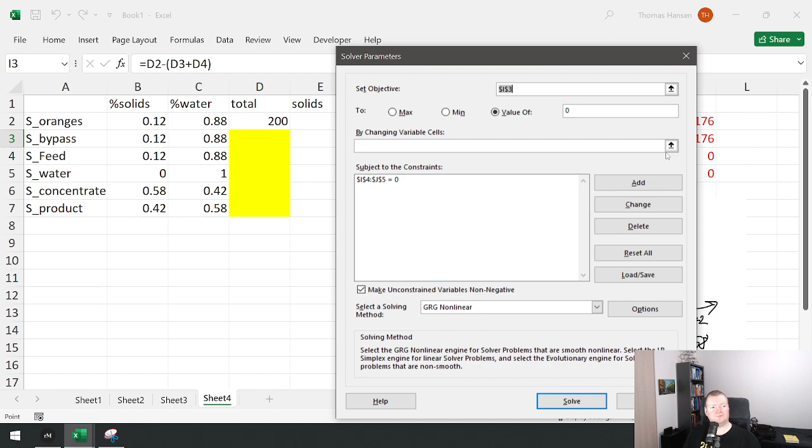And I want one equation and only one of them to be 0. I want all of the others here to be 0. And I want Excel to change all of these lovely values. Solve, Excel found a solution. All of my equations are close to 0. Masses are positive. Does it make sense? Sending in 200. And I'm removing a ton of water and left with about 57 kilograms of product.

So that is how you start to treat systems with bypass. Again, I didn't really do anything differently compared to the previous streams. There are more unit operations to keep track of, there's more streams to keep track of, but the principle is the same. I start out with a section where I have all of the different streams in my system. What are the concentrations of the different components? What is either the total mass or the total number of moles that are running in those streams?

And whenever there's something where I'm like, I don't know, it's an unknown, I just color it yellow, let's deal with it later. And for all of my components, I can also calculate how much there is. And again, I don't care that I don't know what the mass of my bypass stream is. The mass of the solids in my bypass is still gonna be the total mass in my bypass times 12%. At some point, I'm gonna figure out what this value is. And when I do, then this will automatically be calculated and be correct.

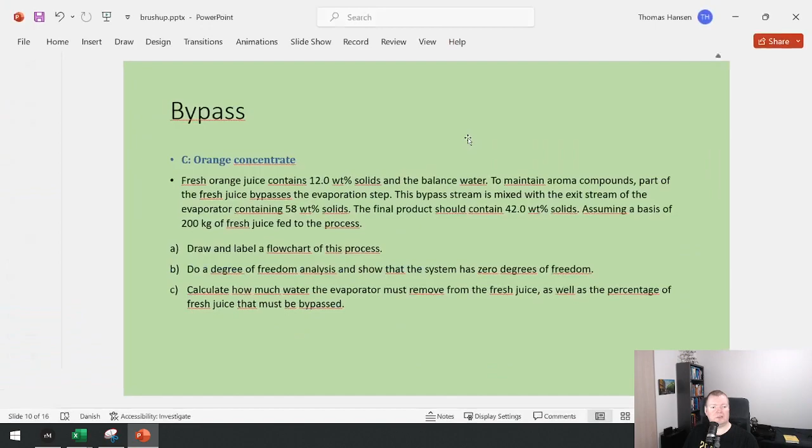So let's just solve it again so we have it. There we go. And finally, I have a section where I set up all of my equations and try and keep track of degrees of freedom and all of this. So I think that was it for today. Orange concentrate, do a degree of freedom. We did that. Calculate how much water must be evaporated.

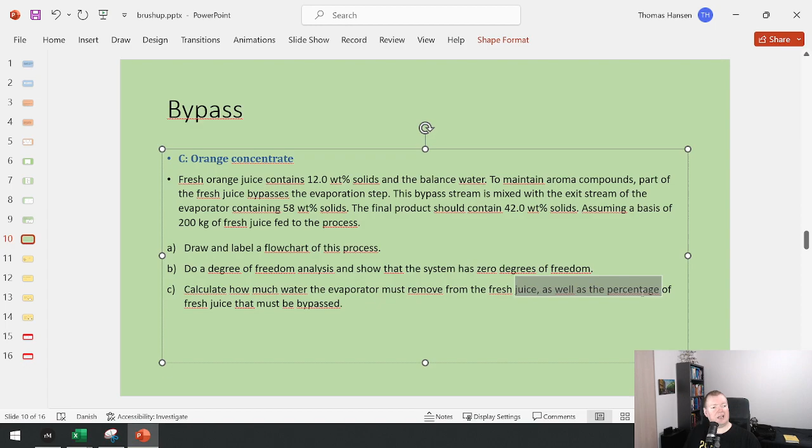We need to calculate the percentage of fresh juice that must be bypassed. Okay, fair enough. So if I want to calculate the percentage that I'm bypassing, so we'll do that here, percentage bypassed. Well, I'm just going to take the mass that I'm bypassing compared to the total mass I'm feeding. So that means I'm bypassing 10%, 9.9. So 10% is being bypassed, the rest goes to the evaporator.

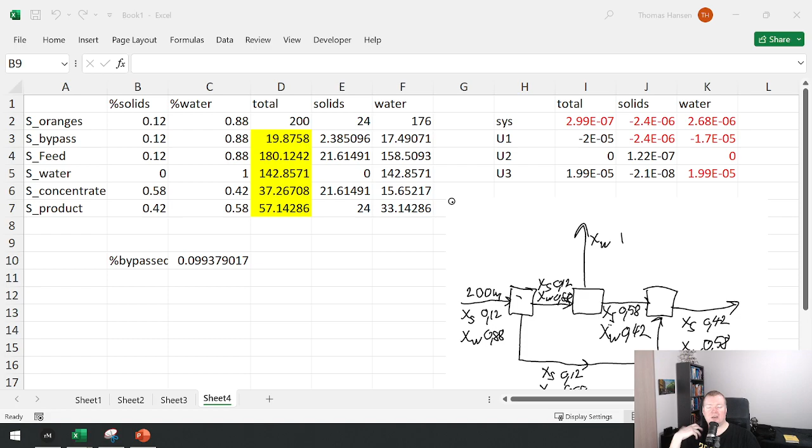And tomorrow's stream, we're gonna start to move into what happens when we have chemical reactions occurring. So the international class, I know we haven't covered much of it in classes yet, but you are of course welcome to participate and see what's going on, and we'll cover the rest of the theory for these things in the following week.